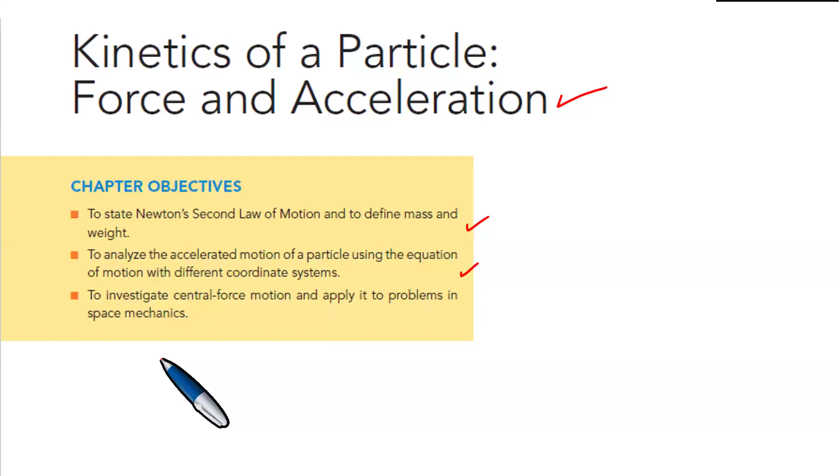In this lesson, we focus on Math 142 UKZN edition, equilibrium, friction, and a lot more. And we proceed as follows. Right, we focus on the kinetics of a particle, force and acceleration. Chapter objectives: to state Newton's second law of motion and to define mass and weight, to analyze the accelerated motion of a particle using the equation of motion with different coordinate systems, to investigate central force motion, and apply it to problems in space mechanics.

We proceed as follows. Right, I want us to look at this particular situation. A 50-kilogram crate shown in figure 13-6a rests on a horizontal surface for which the coefficient of kinetic friction is mu k equals 0.3. If the crate is subjected to a 400 Newton towing force, as shown, determine the velocity of the crate in 3 seconds, starting from rest.

Let's discuss this from the inception of the topic to advanced questions on equilibrium and friction. We have that the coefficient of kinetic friction is mu sub k equals 0.3, and we put it with the 400 Newton force. We need to calculate the velocity of the crate in 3 seconds, starting from rest. So what exactly do we do here, and how do we approach this particular question?

The thing you need to take into account is the notion of the force diagram. So here it's the crate, and as usual in physics, identify the forces that act on the crate. If this is the center of mass, it's going to have a downward force through the center, which is the weight, and this downward force is 490.5 newtons.

So now you then need 400 cos 30, minus 0.3 times 290.5. Okay, and we're getting 259.2615. And then we divide this by 50. And then the acceleration is actually 5.19 meters per second squared. We can write it as 5.185. Good.

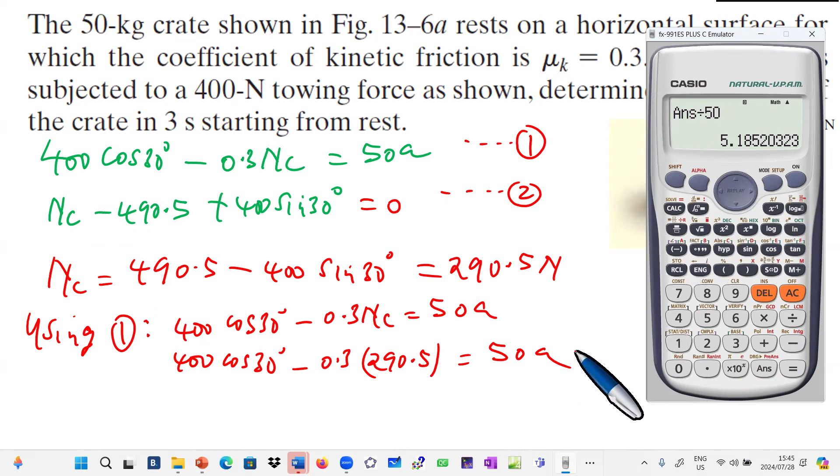So this means that the acceleration is equal to 5.185 meters per second squared. What is the velocity? This plus AcT. And then now you have the initial velocity, because this one is from rest: 0 plus the acceleration, which is 5.185, times the time, which is exactly what? 3 seconds.

And if you compute this, then you're able to get 5.185 times 3, which is actually 15.6 meters per second. 15.6 meters per second. And this gives us exactly the result that is required. Right. So that's what we have.

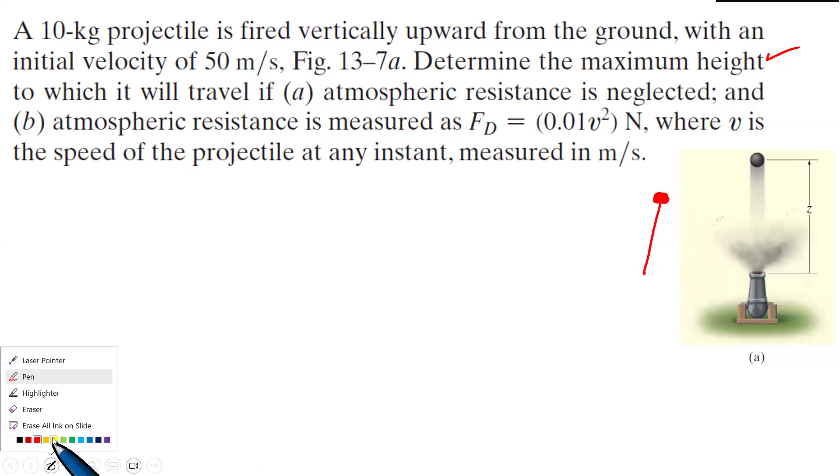Right, so a couple of things that you need to take into account. Here is a projectile you can just draw as a particle like this. A projectile experiences only one force if, as in part A, atmospheric resistance is neglected. With no resistance in the atmosphere, the only force acting on the projectile is its weight, which is subject to the mass.

And we know that the weight is mg, which means the mass, which is exactly 10 kilograms, times 9.8. You can put 9.81 if you wish, or just 9.8. And if it's 9.81 that you take, the decimal point is going to move once, making it exactly 98.1 newtons.

So that is what we then are able to get here. This is the only force that is going to be acting, but the acceleration, because this thing is moving up, is going to be acceleration that is straight up in the z direction. And we agree, therefore, that the acceleration is going to be straight up because it's moving upwards.

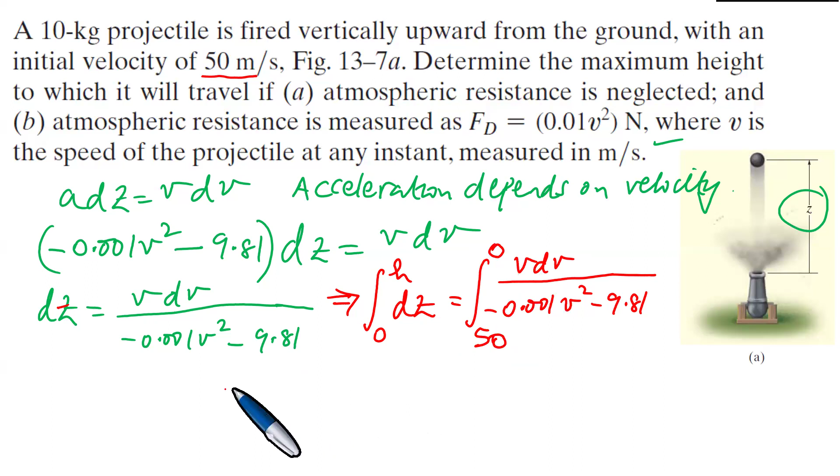Right, we actually need to take note of the following. Remember that it is fired vertically upward from the ground with an initial velocity of 50 meters per second. Okay, so it's going to have an initial velocity of 50 meters per second, but at the maximum height, it's going to have zero velocity. It was projected initially at 50 meters per second, and then at the maximum height, it's going to stop. Minus 50 initial, 0.

V dv. You divide by, okay, pull out the negative because this was negative, so that we have 0.001 v squared plus 9.81. Right, 0.001 v squared plus 9.81, like this. And what is the meaning of all this here? This is all integration. This integration is a very, very important integration, but very easy. What do you do? You can pull out this one, 0.001, you can factor it out. There are many things you can do.

Okay, what is the derivative of the denominator? This should be 2 times this by differentiation, which is 0.002. One thing you can do is to put 0.002 in the numerator. So you're going to get the integral from 0 to h dz, and then you have minus 1 over 0.002, from 50 to 0, 0.002 v dv, divided by 0.001 v squared plus 9.81.

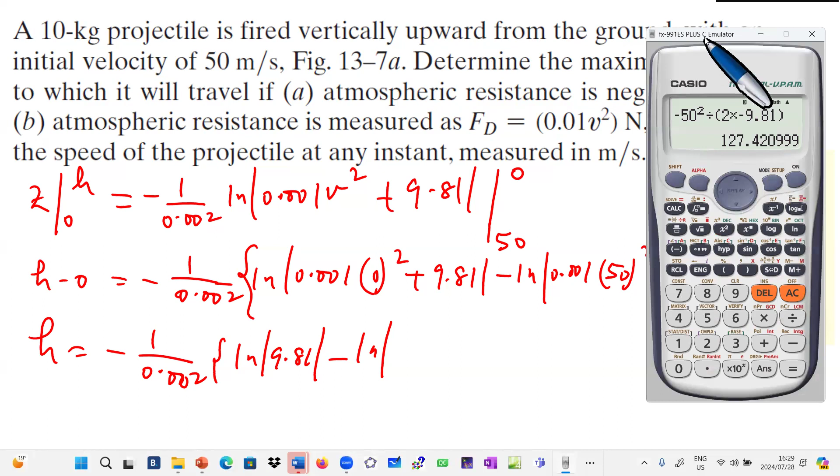Okay, so, all right. Right, so 0.001, 50 squared, 9.81. Which is actually 12.31. So here you're going to have the natural log of 12.31 because it's 0.001 and the 50 squared plus 9.81, and you take the absolute value of that. It is actually exactly 12.31, like so.

Okay. And what then are we able to get? It's minus 1 divided by 0.002. We have the natural log of the following. So you have 9.81. You divide everything by 12.31, like this. And if you use a calculator, you'll be able to achieve exactly the height we need. What is the maximum height reached in the presence of drag, in the presence of what we call the atmospheric resistance. Right, so I want us to punch this on the calculator.

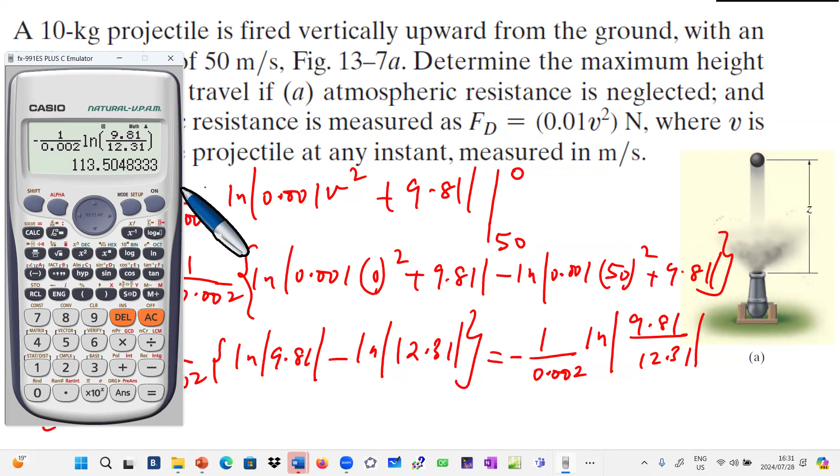So I'm going to punch this negative, and then I'm going to punch this particular fraction 1 over 0.002. Right, and you punch the natural log. Then you go to this one here, which is exactly 9.81. You divide everything by 12.31. And you close like this. And what is the answer? It is 113 point something. It's just about 114. What an awesome answer. So now it means that 114 meters.

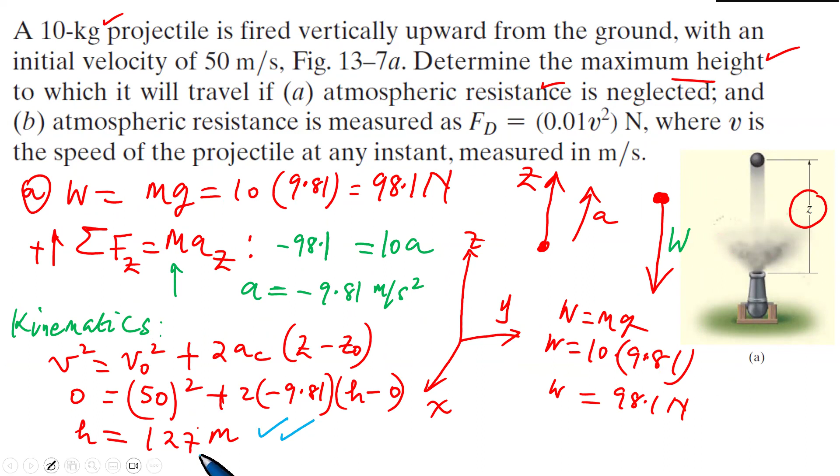Let's look at this. In the previous calculation, we agreed that here's the projectile and it's being fired vertically upwards, but it is reaching a maximum height of 114 when we have atmospheric resistance. We saw earlier on that in the absence of air resistance, it was able to reach a maximum height of 127 meters. So h equals 127 meters when there was no resistance, and h is 114 meters with resistance.

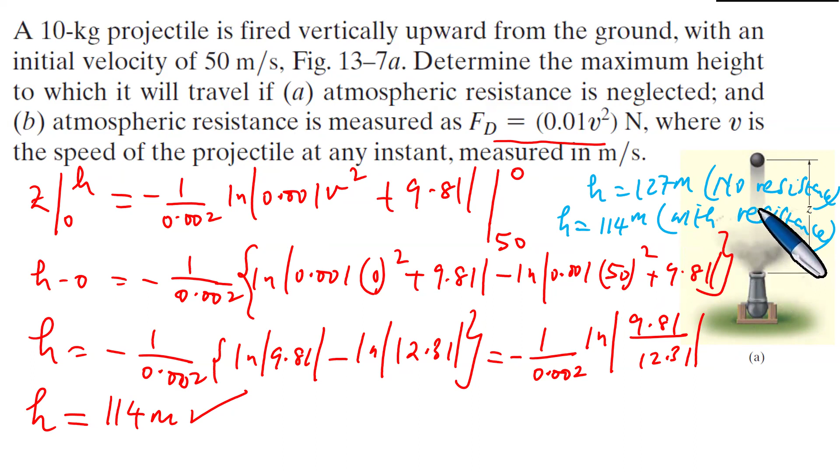So what then is the position here? Resistance is slowing down and reduces the height because it's only 114 meters if there is air pressure and atmospheric resistance, then the ball does not go so high. But if you remove the wind and atmospheric resistance, this object will go very, very high. We continue as follows.

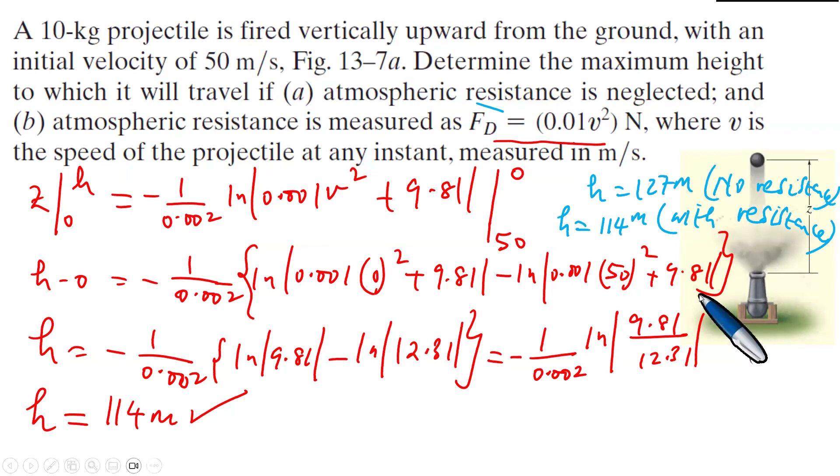In South Africa, you could call this a trailer, or a caravan. For a short time, the driving friction force developed at the wheels of the truck is FA equals 40t pounds. We know the friction force, and you can just write it here, Mr. Examiner, is 40t. And this is actually the force, in pounds, where t is in seconds.

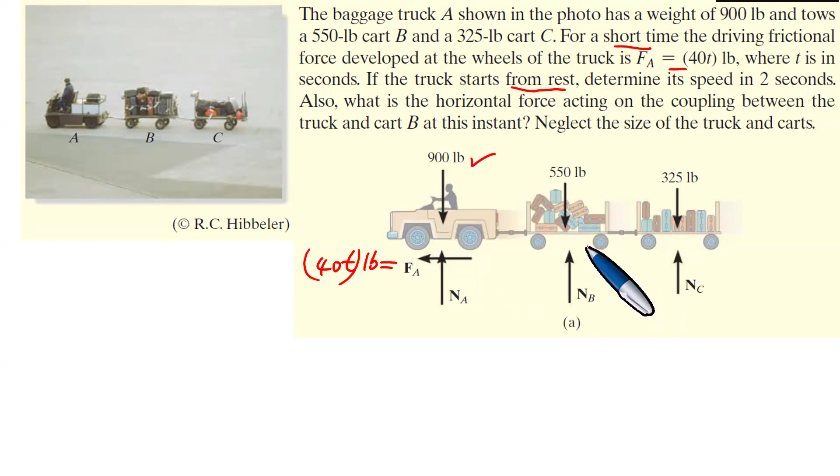If the truck starts from rest, there is the truck dragging the two carts, cart B and cart C. Determine its speed in 2 seconds. Also, what is the horizontal force acting on the coupling between the truck and cart B at this instant? Neglect the size of the truck and carts. Okay, let us look at what is happening here.

Always, when we start these kinds of questions, we look at them in one direction only. We focus on the equation of motion. What is the equation of motion? When this baggage truck is pulling everything, we take the original direction as positive, so that the summation of Fx is equal to m a x. So in the end, FA is therefore 40t, which is actually the force FA.

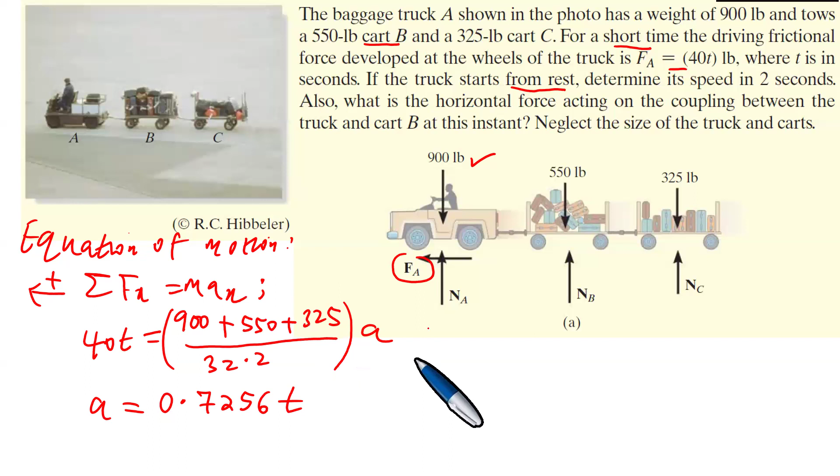Now, after having seen this, this was an equation of motion from Newton's second law, but now there's something called kinematics. Kinematics is what we use next. First we consider the forces, and then we look at what we call the kinematics, the equations of motion that are involved here. Right, so looking at the kinematics, we have the following. So the kinematics is going to be what? It's going to be coming from this guy. What exactly is this guy?

Kinematics is going to emerge from the fact that acceleration itself is 0.7256 t, which means that we have dv/dt, which is 0.7256 t, which means that you have dv, which is 0.7256 t dt. We actually have that dv is 0.7256 t dt from the previous calculation, and then we can get the,

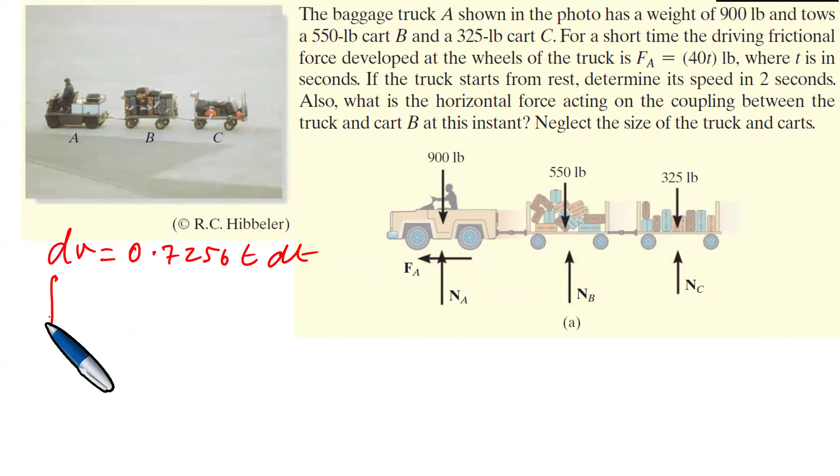okay, what do we actually want to achieve in this particular question? If the truck starts from rest, determine its speed in 2 seconds. So you want to find the speed in 2 seconds. Right. So what is the speed in the 2 seconds? So you find this one. Right, so we have this one, 0 to v.

And then now in the 2 seconds, you say the time here is from 0 to 2. You can say 2 seconds like this. And it is 0.7256 t. The velocity becomes 0.7256 t squared over 2. It is integration.

We're using integration, normally stated in terms of the n formula, okay? Which means if it is t to the power n, it becomes 1 over n plus 1, t to the power n plus 1, plus the arbitrary constant of integration c. So in the end, you then have this one, from 0 to 2, like this.

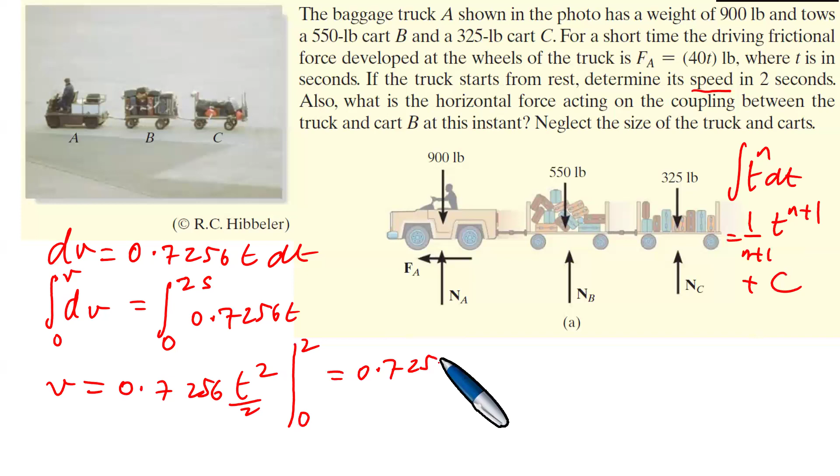Okay, let's compute, which is 0.7256 over 2, times 2 squared minus 0. Okay, 2 squared divided by 2, it's 2 times this. 0.7256.

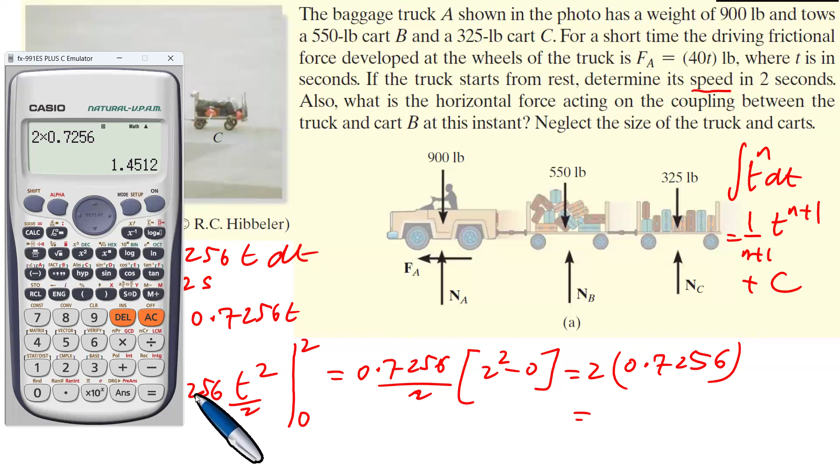So 2 times this. 2 times this. Okay, let us check. Can use the computer here, calculator. Right, use the calculator to actually compute the actual speed that is required. So the speed is going to be 2 times 0.7256. And we get the answer. It is 1.45 feet per second, which is 1.45. So it's 1.45

feet per second. Okay, this is a problem that would be mostly for the British, because the British are the ones who are using the pound as a unit of force. Are the ones who are using the pound as a unit of what? As a unit of force. But now, obviously, we use the Newton in South Africa, but some people in other countries use other units like the pound, the LB. Okay, now let's continue.

Okay, but what was the question, just to make sure we've answered it. If the truck starts from rest, determine its speed in 2 seconds. Also, what is the horizontal force acting on the coupling between the truck and cart B? Here is the truck, and there is the trailer that the truck is dragging. What is the horizontal force acting on the coupling between the two at this instant? Neglect the size of the truck and the carts.

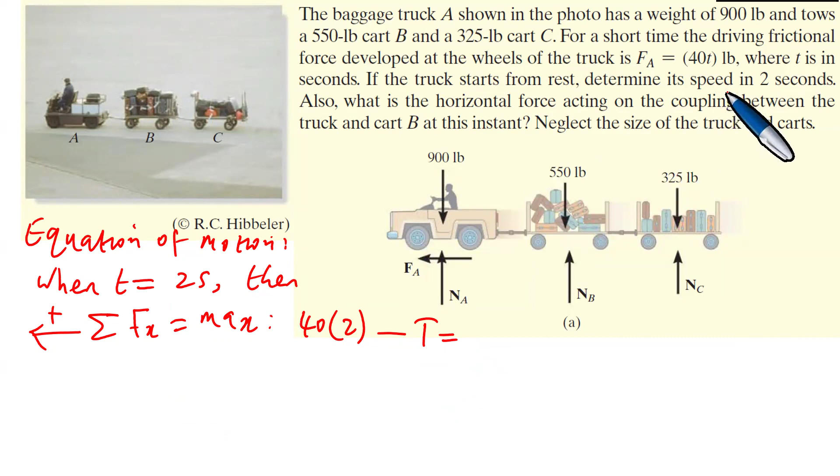So the equation of motion now when t equals 2 seconds, because we want the actual coupling force there. So we want to get the tension. This horizontal coupling force is a force in the x direction, right? The vertical is the y and the horizontal is the x in the Cartesian plane. So at this point, the force on the horizontal is going to be 40 times 2. Let me write a little bit more here.

So in principle, the forces in the horizontal are going to be Fa minus the tension. And this is the same as max. What is Fa? Right, our Fa is 40t, which means you have 40 times 2 seconds minus the tension.

Remember what is happening here: the truck is pulling in that direction, the tension is the other way. These two are in opposite directions, wrestling with each other. The trailer is pulling the truck to the back while the truck is trying to pull everything, the two cars, the two trailers, from the back. By Newton's third law, this is a pull and drag situation. An action-reaction pair of forces is involved at the point of contact of the truck and the carts.

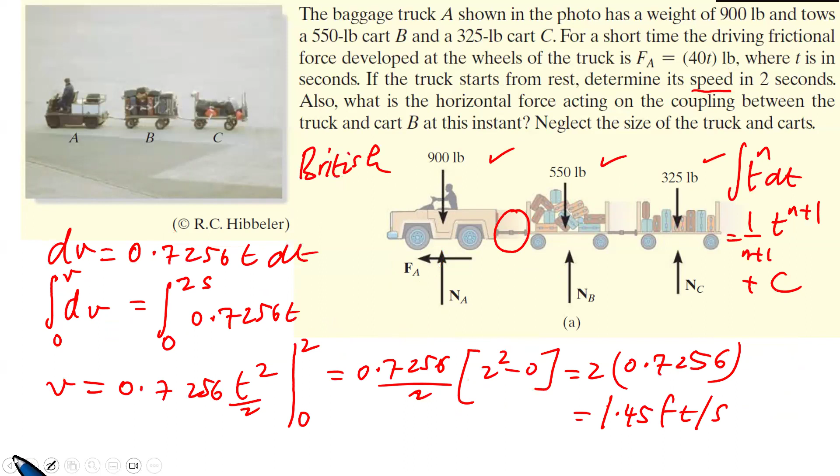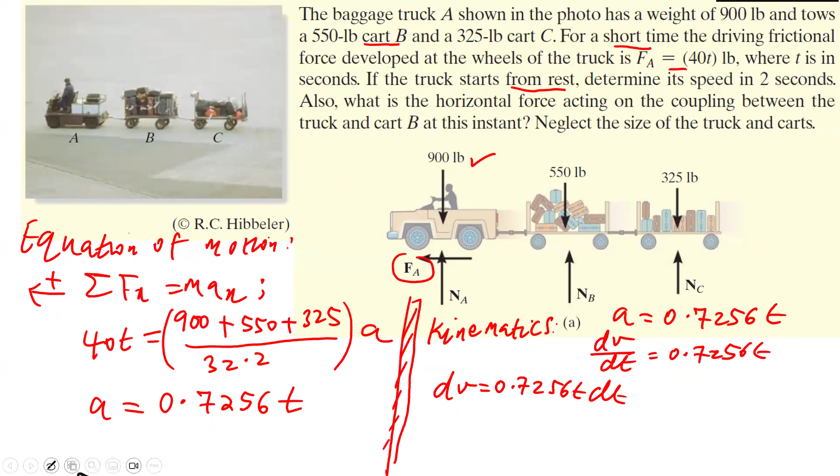Multiply by the acceleration in the x direction. What is the acceleration in the x direction? We saw before that the acceleration in the x direction is 0.7256t, 0.7256t, which is 0.7256 t, and t is 2, like this.

Okay, so what is the tension? Use a calculator. You multiply this, take the T to the other side and subtract with the calculator, and you're going to get the tension is 39.4 pounds. There's the unit of force. Right.

So yeah, it's something that you need to take into account and make sure you understand and make sure that everything is okay, and now you are able to understand everything very well. Okay, so take note of that, and make sure that you are able to understand every single bit of what we're doing.

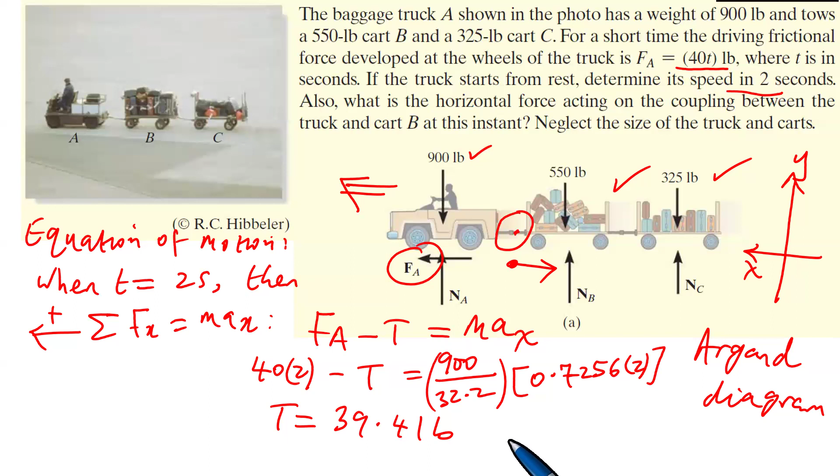Okay, let us look at this one. A smooth 2-kilogram collar shown in figure 13.9a is attached to a spring having a stiffness k equals 3 newtons per meter and an unstretched length of 0.75 meters. If the collar is released from rest at A, determine its acceleration and the normal force of the rod on the collar at the instant that y is equal to 1 meter.

Let's look at these together and see what you need to do here. A smooth 2-kilogram collar is shown there. Here is the collar. It is attached to the spring with stiffness k equals 3 newtons per meter, and an unstretched length. If it's not stretched, the spring has a length of 0.75 meters.

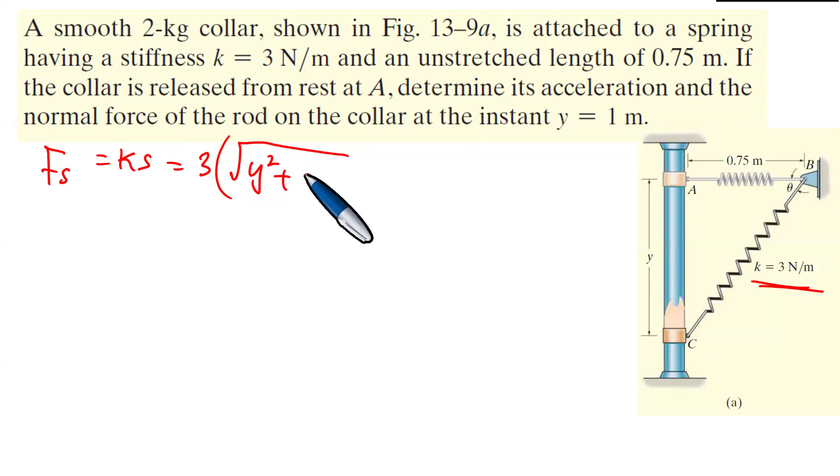AB for the unstretched spring is 0.75, and this gives us the actual s, which is the stretching of the spring. Now we continue and say the spring force is ks. We know that k is 3 newtons per meter. The s is the square root of y squared plus 0.75 squared, minus 0.75.

So then the question you're asking is, what is the angle theta? Because here there is theta. We're able to see that the tangent of theta is opposite over adjacent, from SOHCAHTOA, which is y over 0.75. This one is 0.75. TOA, opposite over adjacent.

So now we have these two equations. We substitute y equals 1 into equations 3 and 4, and this yields... we continue.

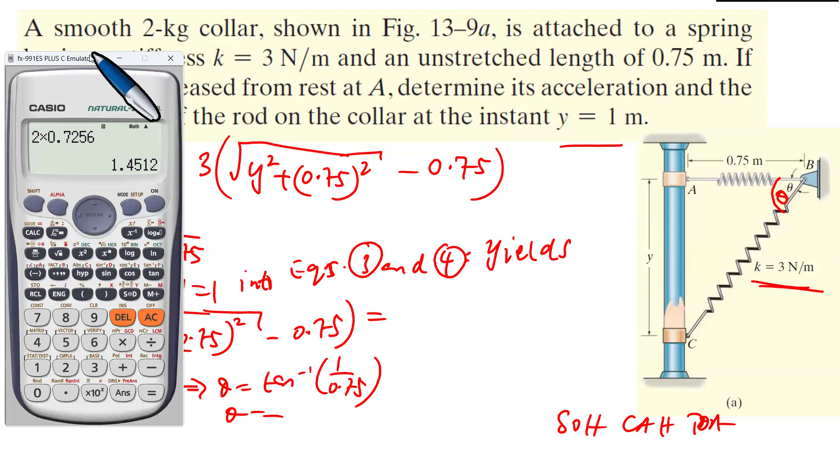So, right. Right, so now you have 3 times the square root of 1 plus 0.75 squared, minus 0.75. Okay, which is like 1.5, 3 over 2. Right, so I have just done the spring force.

Right, so now, okay, I'm gonna release you. I'm gonna take a break.

Right, so which is actually 3 over 2, which is 1.5. The spring force is 1.5 newtons. So now, what are we able to achieve here? Okay, we can even get the angle theta. What is the angle theta? Okay, let's use the calculator quickly.

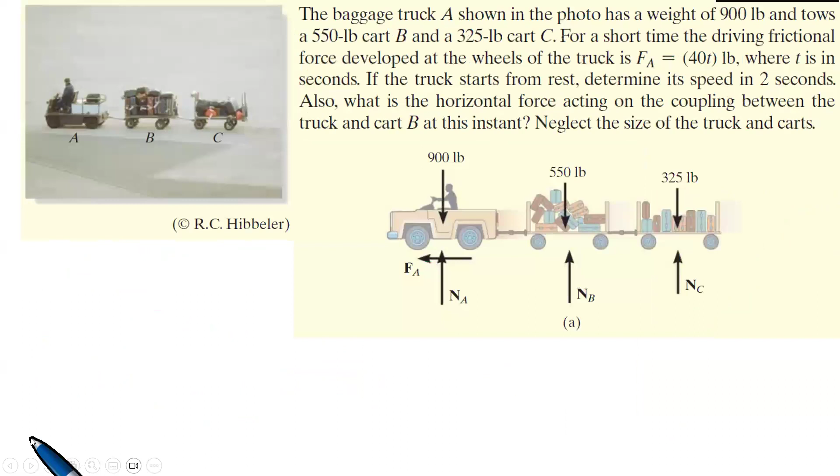I'm rushing you, please, I know. I'm running out of time.

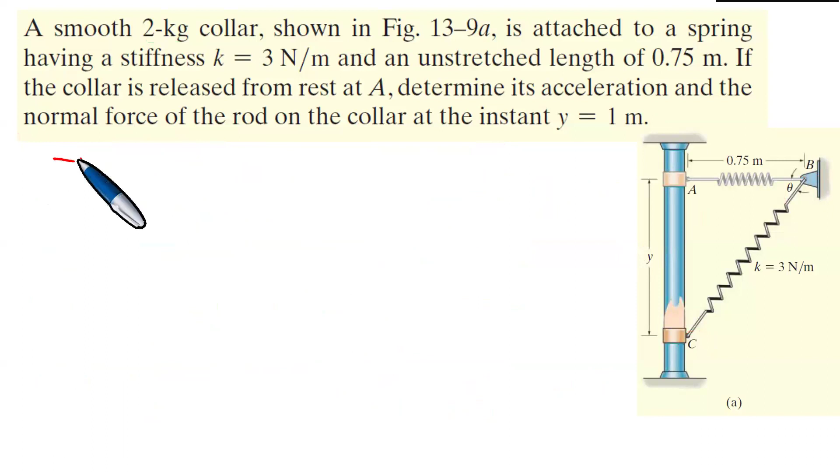Minus NC plus Fs cosine theta equals 0. So NC is equal to Fs cosine theta. And what is Fs? The spring force, 1.50. So 1.50 cosine of 53.1 degrees. Okay, use the calculator. We need to find the normal force, and this is the normal force. Just need to calculate this one from one of the equations.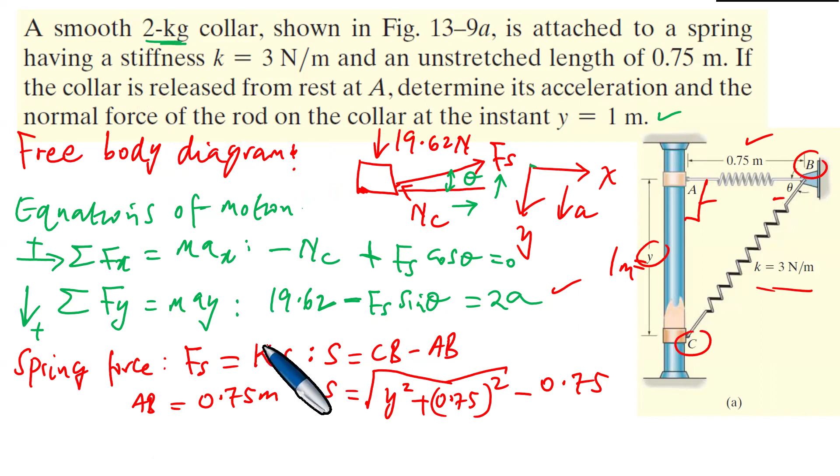And the acceleration is going to come from this equation, because this equation has acceleration. We just put in the spring force. So we put 19.62 minus Fs sine theta, which is 2a. So 19.62 minus Fs, the spring force 1.5, times sine theta, where theta is 53.1. We need the acceleration, so we just divide by 2, and we get the acceleration.

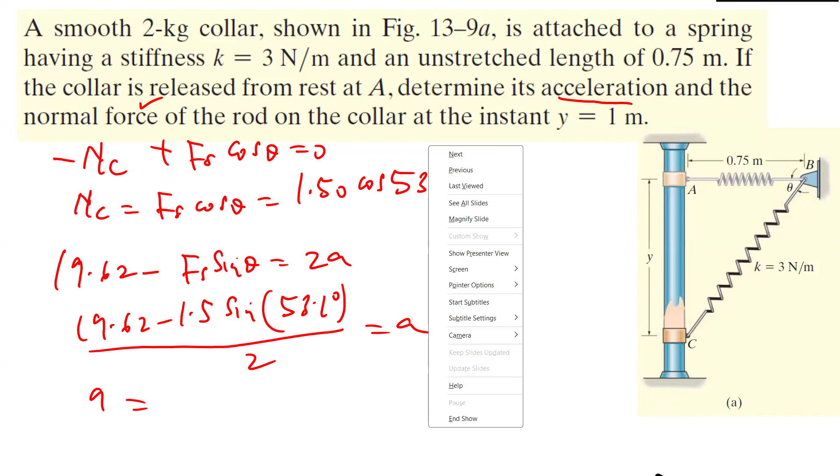Yay. Okay, yeah, we're finishing. And then I'm going to release you so that you can go to the church and do your things, which is good.

Okay, I'm going to do the normal force. Just want to confirm these answers. 1.5 times the cosine of 53.1. And then I'm going to meet you again at what time? Okay. Right, which is 0.900. 0.900 is the normal force, in newtons. And then the acceleration, let's find it.

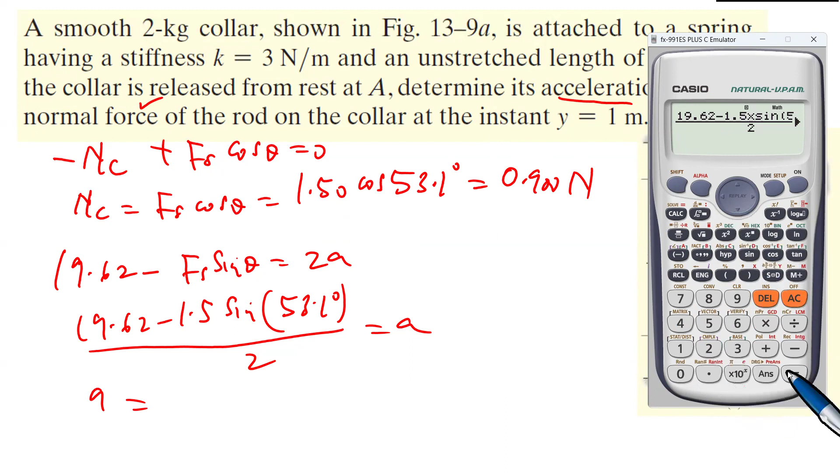Which is 19.62 minus 1.5 times the sine of 53.1, divided by 2, which is 9.21 meters per second squared. Okay, so we found the acceleration and we also found the normal force.